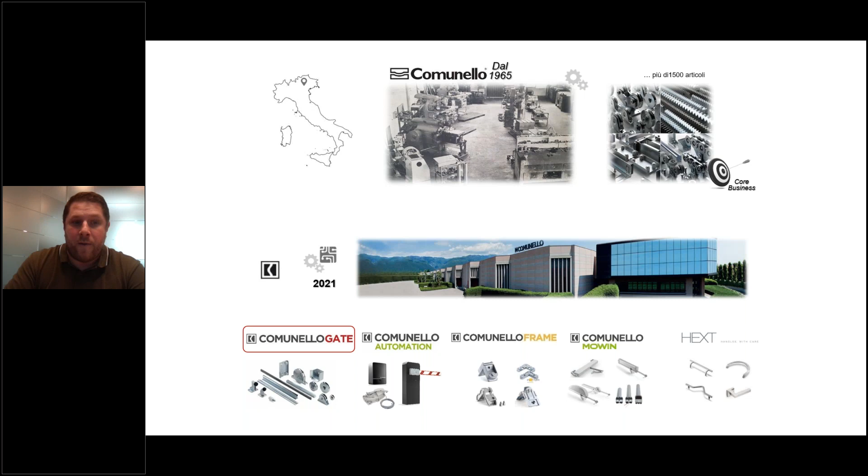It would be much easier maybe to produce something abroad sometimes, but we are very focused on quality. Quality is the most important part of our business and what we are going to provide. Quality for us is the most important subject with what we do. So also with the quality check and how we produce, we are very careful in how we do things and how we produce everything, and everything is checked one by one. Everything is checked.

So let's start with the gate division. We will see, let's say, just the surface of what we produce, so this will be a kind of general introduction to all our products. So for the gate division, we are producing all these accessories for many types of gates. Let's say for almost all types of gates we have something to offer.

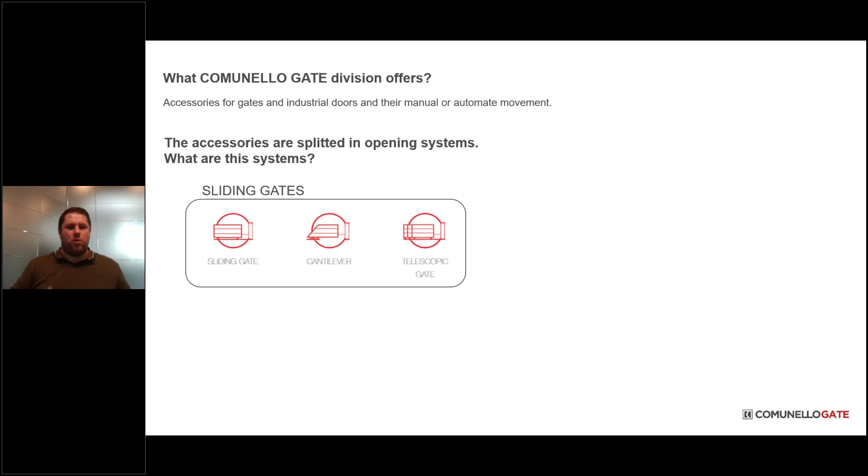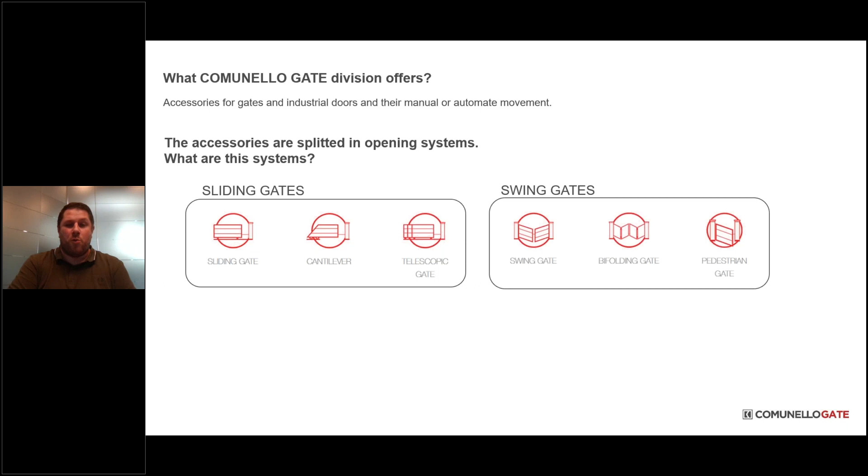So sliding gates, of course, which can be split into cantilever gates and telescopic gates, besides the traditional sliding gates with the rail. Then we also have accessories for swing gates, also bifolding gates and the small pedestrian ones. And then we also have a branch of the gate division, which is industrial doors, so suspended gates, folding doors and sliding doors that you can find in industries, for example. We also have some accessories for steel doors and windows.

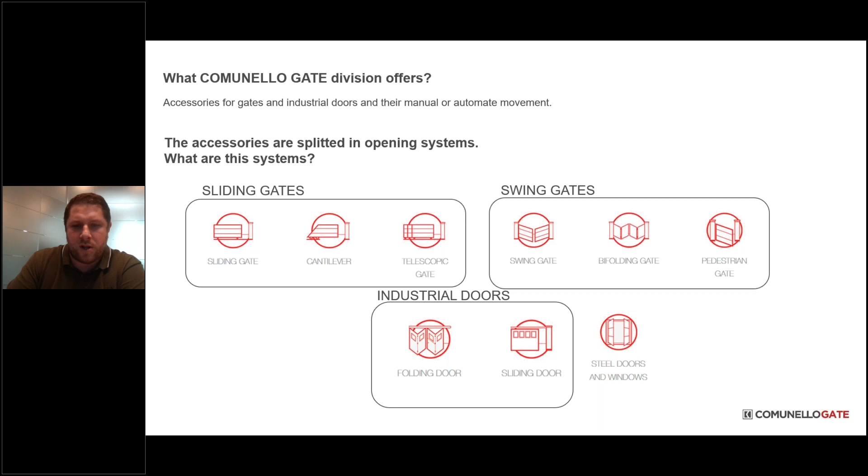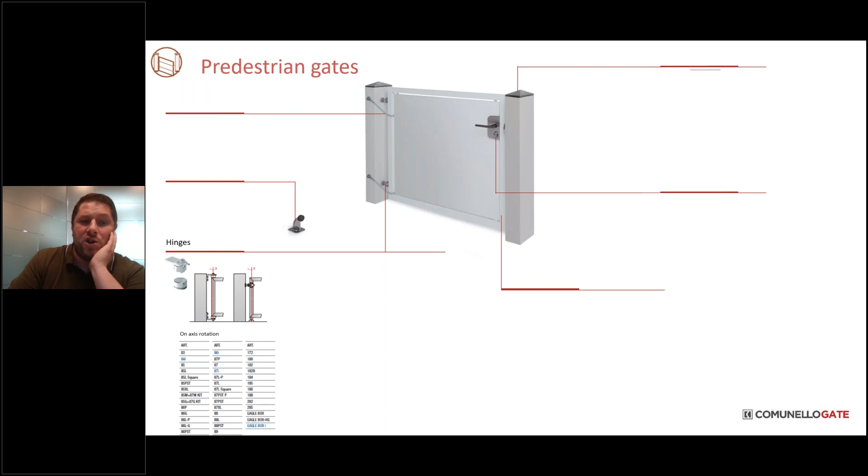So let's see first of all which are the components, the families, the categories of products that we can offer. We have hinges, first of all, for the swing gates. We have different kinds of hinges, on-axis and off-axis rotation ones, and also some hinges for 180 degree openings. We have all the smaller side accessories like gate stops, the anti-fall ropes as a protection. Then we have the pillar covers, which are really simple pieces actually. Locks and accessories, the latches.

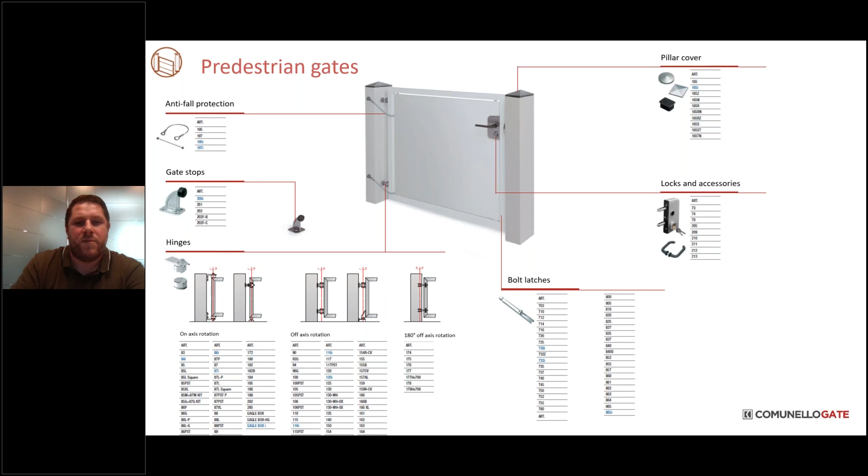For swing gates, the most important things are the hinges. So here we have a global view of the hinges that we have. Let's say that the hinges that we produce are a sum of all the needs that customers may have. There are also some geographical reasons why we are producing certain types of hinges, because of some needs that installers have around the world, around our markets. So you can find many different hinges that are for the same purpose actually.

So as you can see, our company is producing many different hinges, and the on-axis rotation ones are those for which the rotation is inside the profile of the gate. We can say that the most popular ones are the ones that you can see in the kit, so the 85 and the 87.

When you are going to choose one of the hinges, it's very important to determine the weight of the gate that we are going to create. We have to know its weight, because with the weight and the measures of the gate, we can suit the perfect hinge. It's important to be very careful with these parameters in order to create a perfect gate. The quality that we do is also thanks to the skills of our customers. So it's very important to choose the right product for the gate we are going to build.

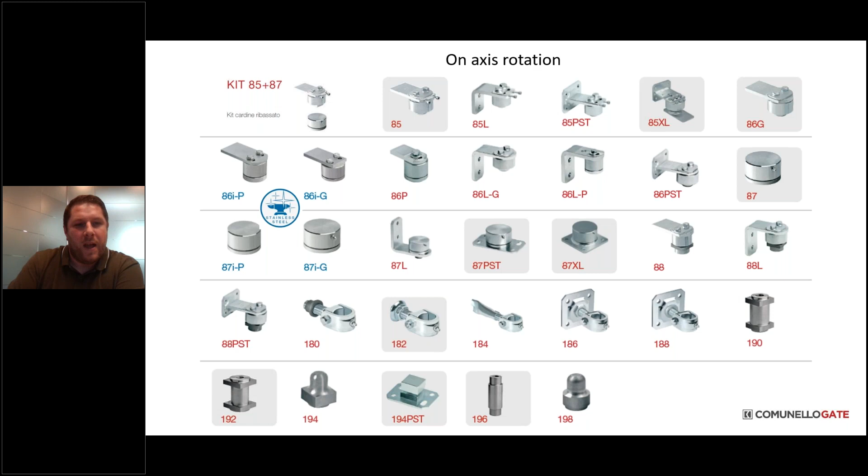As you can see, the on-axis ones can be of several types. The on-axis rotation, as I told you, the most popular ones are the ones on the left side of the page that you can see here. So the bearing hinges. With the bearing, we can grant a really big capacity. We also have some hinges that will have a capacity of 4,000 kilograms. So that means for heavy duty also.

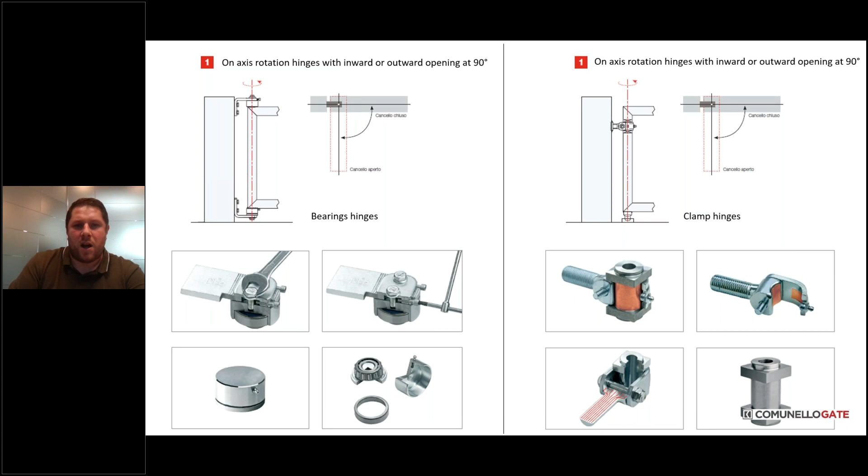Then we have the clamp hinges, which are also inside. With the clamp, we cut the profile and then we put inside a pin, let's say, which is clamped by the hinge. These are the typical off-axis rotation hinges, so hinges that are on the side of the profile. Generally, with this type of hinge, we cannot reach the same capacity as in the previous category, but they are very popular because they are really easy to install.

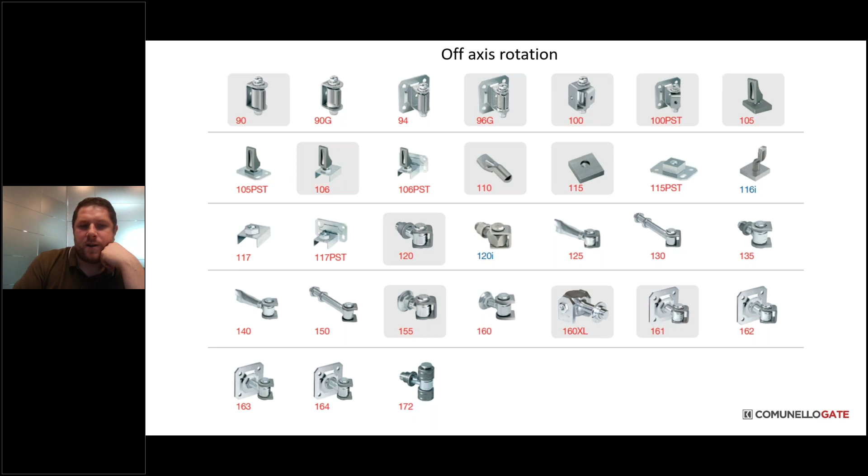You just have to place in the pillar a part of the hinge, and the other one is welded on the profile, so it is very easy to manage as a product. Then, as you can see, there are many different types of these hinges.

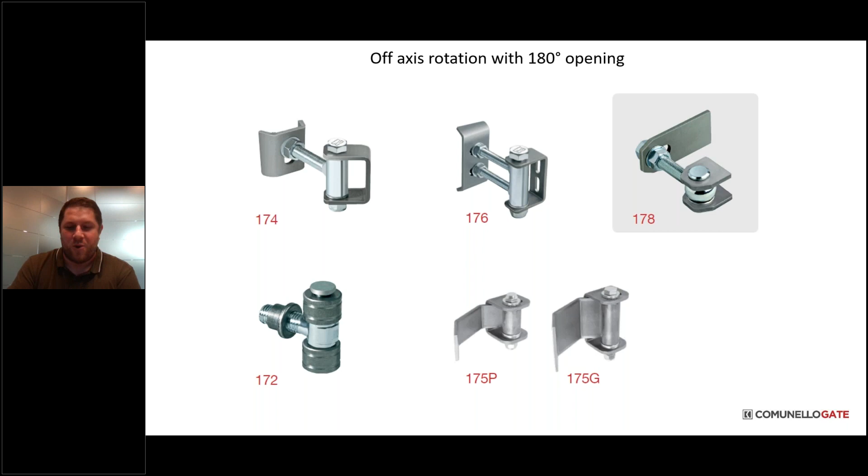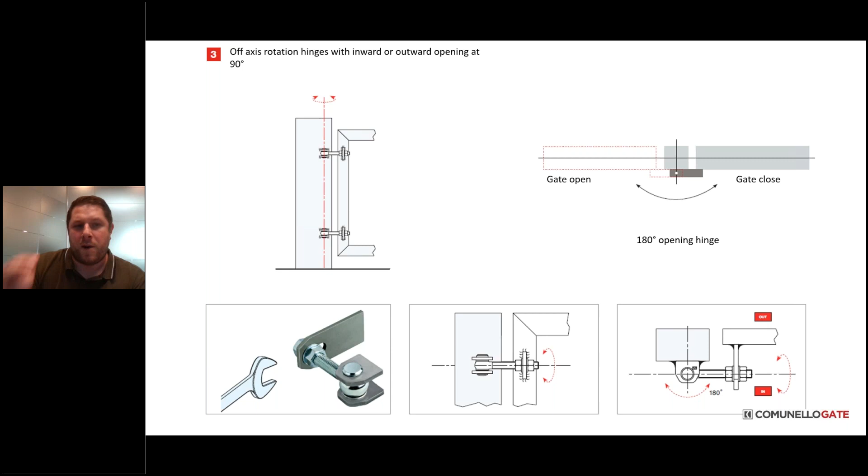For the 180 degrees opening, this is a special kind of hinge which is necessary, for example, when it's not enough just to open a gate, but you need also a free pass maybe for a car or for the machine or for trucks, just to be able to reach the maximum opening of the gate. So this kind of hinge, of course, is much more complicated and the capacity will be much lower, but we have also this option available.

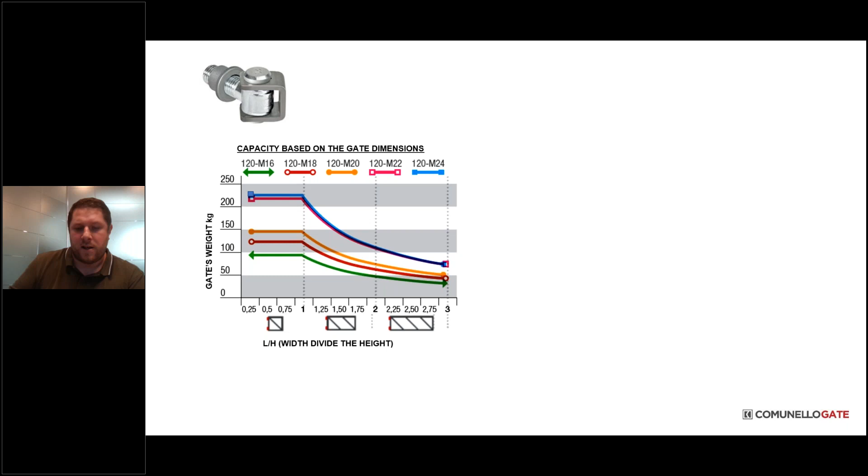The most important thing, as I told you, when you are going to decide which kind of product to choose when you are going to build the gate is to read the technical sheets that we have in our website. So you can find all this information in our website, or they can be provided by our agents, by EPCOM. You have to determine, first of all, which is the ratio between the length of the gate and the height of the gate.

So when you are able to determine this ratio with the dimension, we can determine the actual capacity for the weight of our hinges. It means that in the catalogs, for example, you will read a number, which is the capacity in kilograms, but it is just the capacity that we can grant you if the ratio between length and height of the gate is 1. It means length and height are the same. If the height is more than the length, no problem. We can grant you the maximum capacity.

If then, as it is more usual, at least in Europe, the length is more than the height, then we have to be careful on this graphic that you can see and determine in this way which is the actual capacity of each hinge. This is something very important.

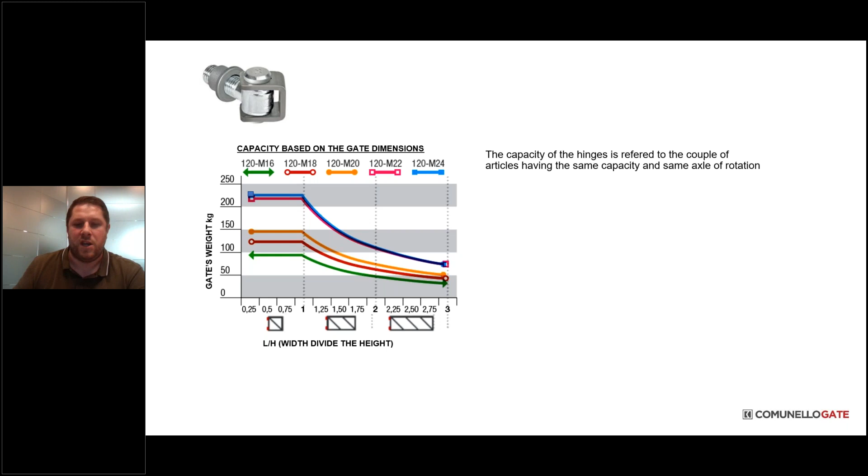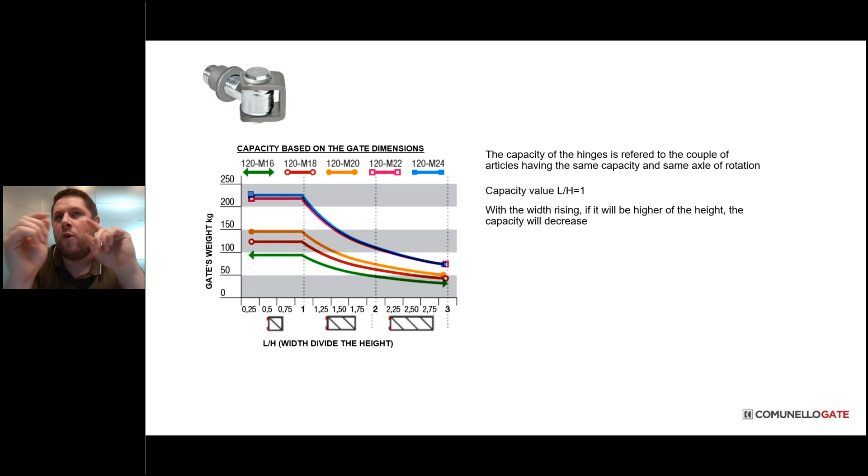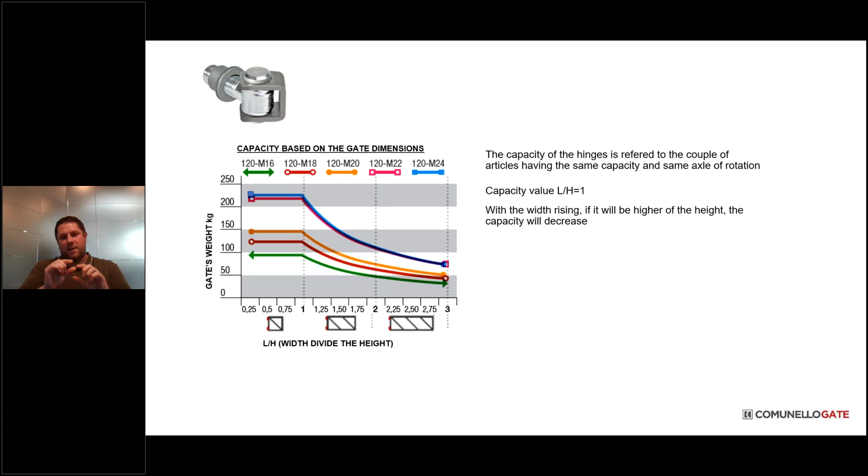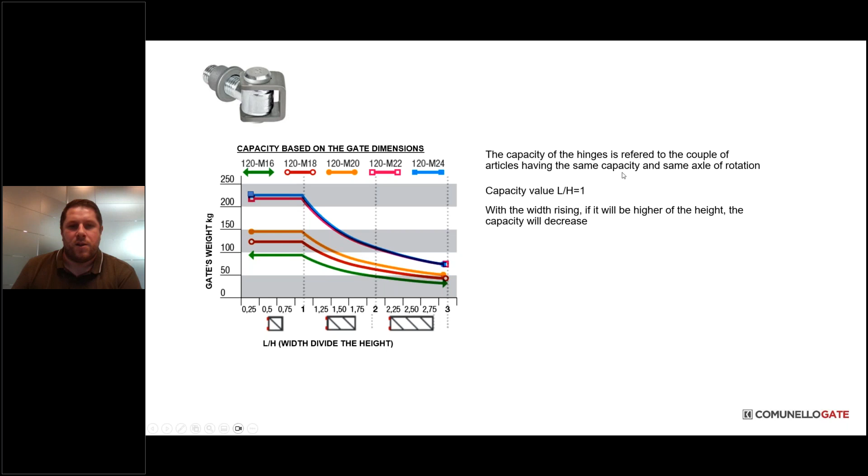So one more thing, it is just a recommendation. If we have two hinges with different capacities, the total capacity that we can grant is the minimum capacity value, which is the real capacity of the gate that we have. For example, if we have 200 and 150, the total capacity we can declare for the combination of the two hinges will be 150. So the minimum one, the smaller one. Okay.

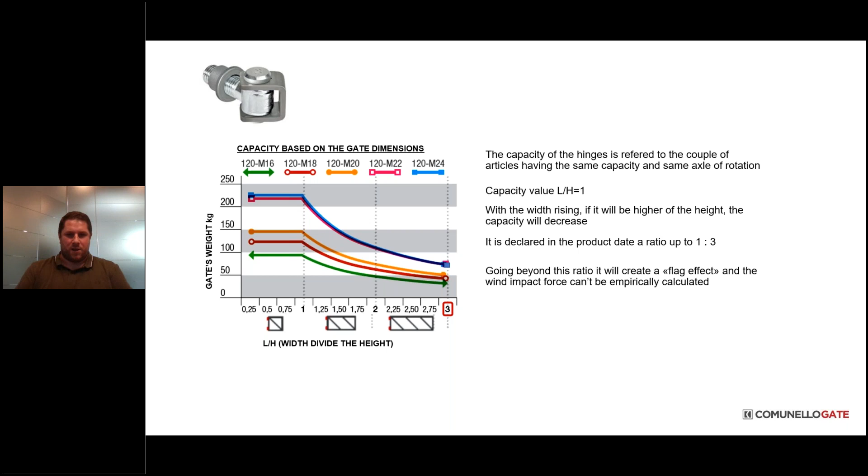As I told you, we declare up to 3. The ratio cannot be over 3. Over 3, we are not able to grant you anything. So there is no test made, and it means that maybe something in the dimension of the gate must be changed. Okay, so we can proceed.

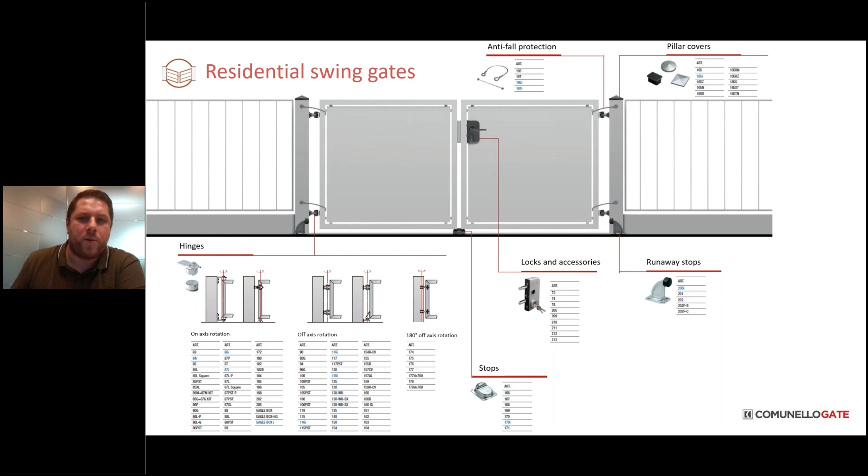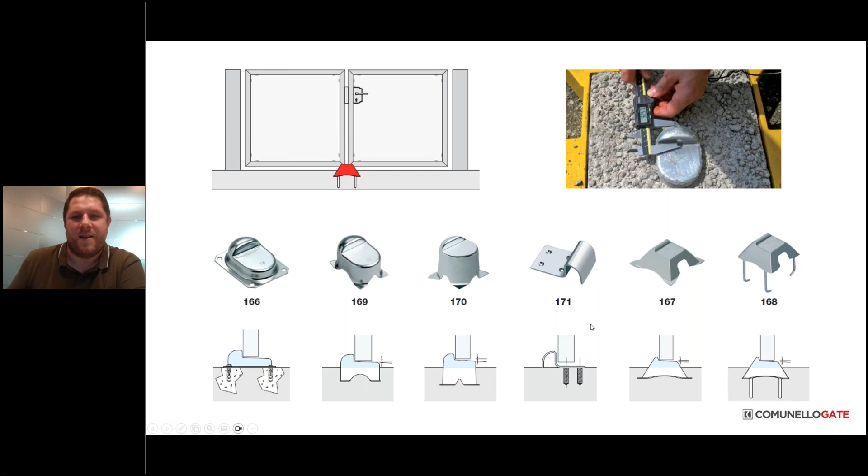For swing gates, as I told you, it depends on how big the gate is that we have to create. As you can see, we have also possibilities of providing locks and accessories of all kinds, the runaway stops, for example, which are very important, and the stops to stop the two leaves of the gate in the middle part. Otherwise, it will be maybe on the street, and it's not what we want to create with our products. So we have also all these safety devices that are useful to create the perfect gate.

Let's go now to the sliding gates, which are maybe the main products that we are going to see today, because this is kind of the core business, I think, for the American markets. For sliding gates, of course, the choice of the wheels is the most important part of a project. So we can see here now the typical sliding gate with a wheel on the ground with a rail.

The wheels, as I told you, we will see then in detail. It is the most important component of our gate that we have to choose. Then we have the tracks, the guide plates, which are very important for the stability of the gate and to keep it in a horizontal position with a perfect sliding during the whole time.

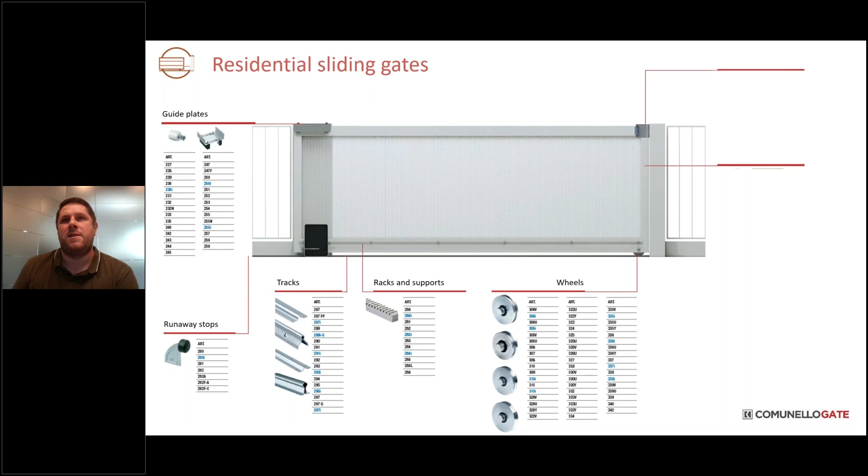The runaway stops, of course, to stop the sliding. Rack and support, which are necessary if we are going to make it automatic. The upper end and the locks accessories, of course, and other devices and safety.

Then we can see here, this is something important, as I told you. We can see here the choice of the wheel. This is very crucial, very important, because this is the most important part that we have to choose. And we have several diameters, of course, of wheels.

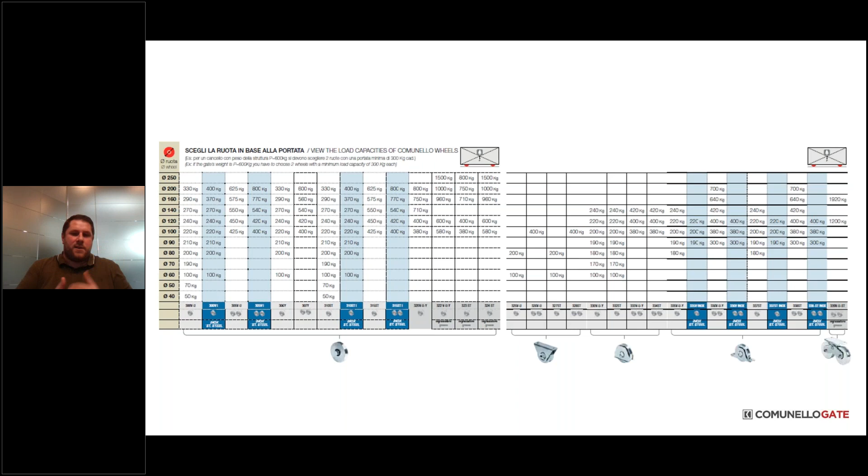One thing I didn't tell before, I know it is very important for you: all the accessories are with the metric system. So I'm speaking today with kilograms and millimeters. So I apologize for this. I'm not very used to the

imperial measures, but as you can see, there are several diameters of wheels, and we have also different supports. So different types of how the wheel is equipped, just to fit perfectly in the profile that we are going to use.

An important rule to determine which is the right wheel to choose is to see the capacity, as we did before. But this time with the wheels, the total capacity is given by the sum of the wheels. So if we are going to choose, for example, this wheel, let's say the 300V, with a diameter of 120, it has a capacity of 240 kilograms. Two of these wheels will have a total capacity for the gate of 480 kilograms.

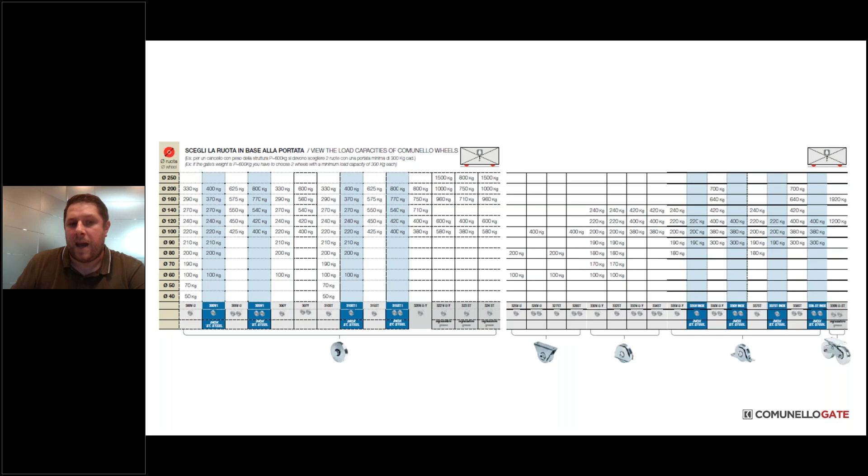If we are going to choose 3 wheels, we will never be sure that the 3 wheels are working at the same time, and it means that always the real capacity of the gate will be made by 2 of them, not 3. So this is the reason why we cannot cheat too much with the numbers, with capacities.

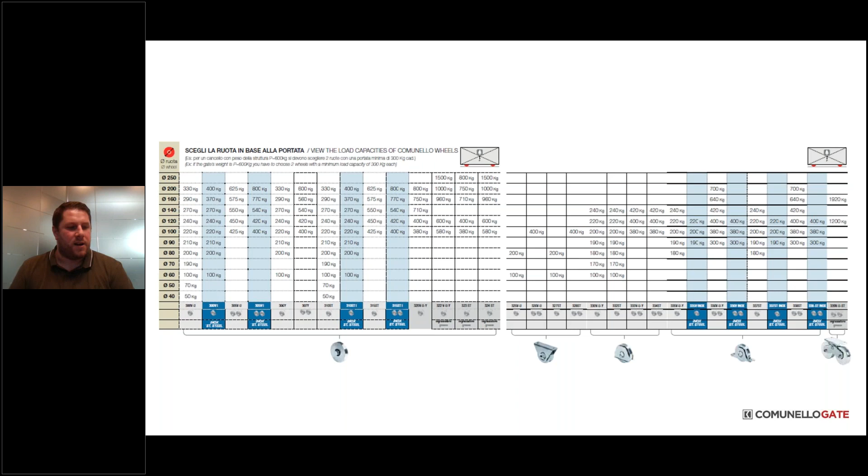As you can see, there are also the other supports for the wheels. These are given just for some specific needs of the installer, because sometimes it is much easier for them to place them right under the profile or inside the profile. So we have these different types of support just to complete the offer and give the customer everything for their needs.

For all these products, of course, quality is very important. All the wheels that you see are produced here, and all the production is made with the lathe machines that we have here in our company, and the quality of our wheels is very well recognized in the market. The quality of our products is very high, and that is easily recognizable from the wheels also. Many of our customers call our wheels the Ferrari of gate accessories, especially for the quality, which is very high.

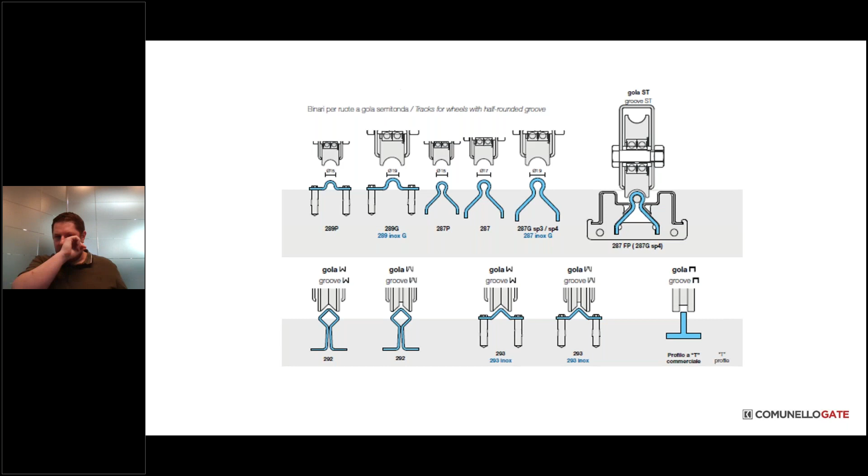The rails don't really have a capacity declared, they don't have any kind of capacity declared, actually. The capacity is just given by the wheel. So this is very, very important.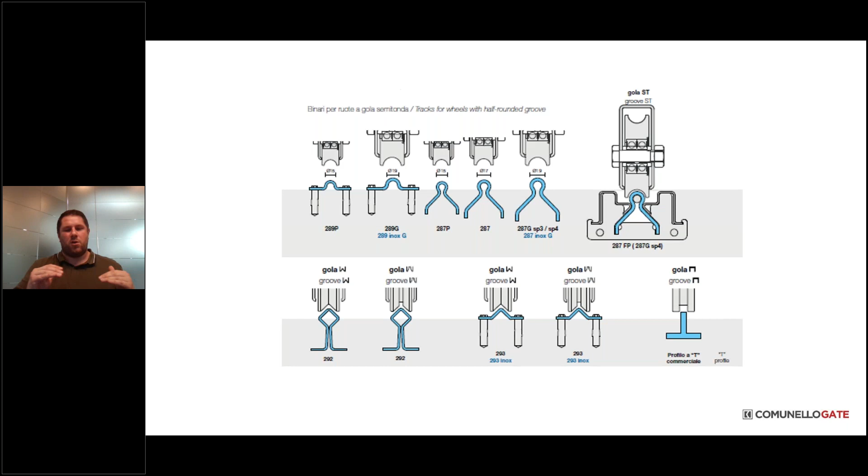As you can see, we also have some solutions for invisible racks, invisible wheels and rails with 287 FP. It means that it is completely covered inside the soil, so it is almost invisible, almost invisible.

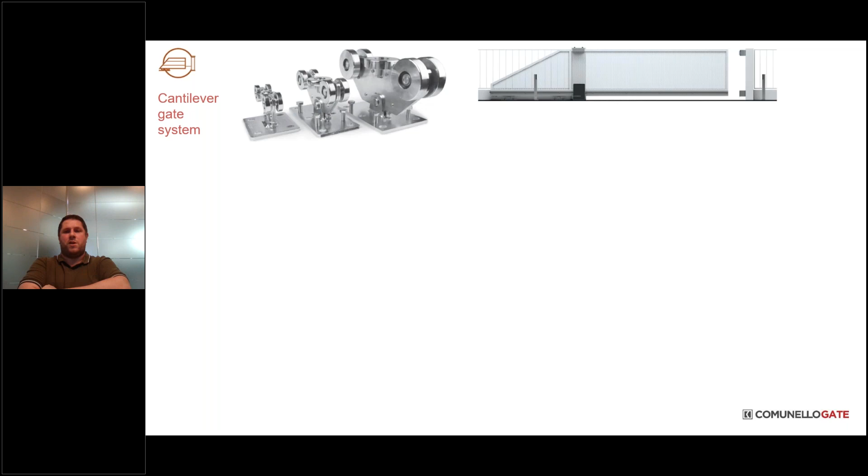Then we can switch, we can go further with the cantilever gate systems. We have many different solutions. This is something very important for us, and for this type of products, it is very, very important the accuracy. We must be very accurate in the choice of the accessories, and also in the dimensions, in the measures that we are going to have to build this type of gates.

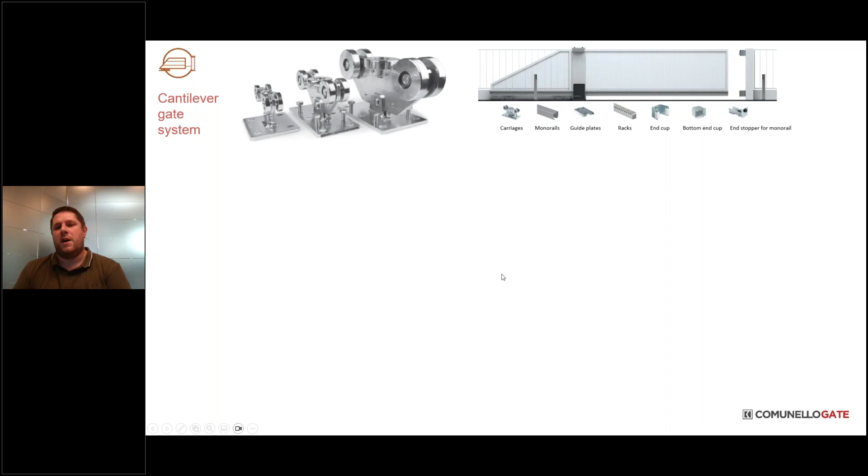So for the cantilever gate system that we offer, we can offer a complete range of products to build the entire gate. So we have the carriages, monorail, all the guiding plates, racks for the automation if necessary, end caps, bottom end caps and stoppers. But the most important part is to determine which is the carriage, and so also the monorail to use. We have, as you can see, many models of carriages with many sizes, and also different materials if necessary.

Let's start with the smaller one, which is the CGS 150. It can be M or P. For the other families of products, for the other categories, we have also the G, and I'll explain you what they mean, what these three letters mean. M stands for mini, the Italian word mini, which means very small. P stands for piccolo, which is small, while G stands for grande, which means big. So these three different sizes will also determine which is the right one to be placed, considering the weight and the measure of the gate that we have to move.

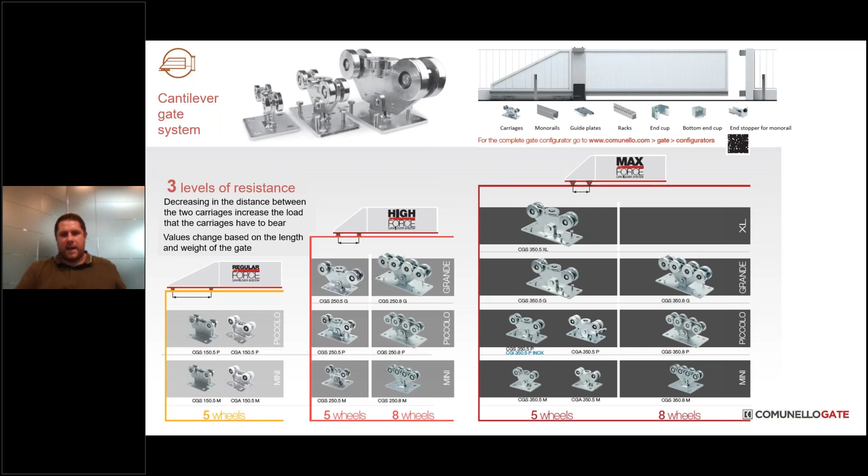Then you can see how it works, for example in the choice of gates. We also have the XL carriage, as you could see before, on top of the 350. This XL is used for very heavy gates - we can reach up to 20 meters long and 3,000 kilograms.

As I told you, the configurator will give you the I, the inter-axis between the two carriages, and the FA, which is the dimension, the length of the foundation that we have to create with fresh concrete, just to fit exactly with the dimensions given by the configurator.

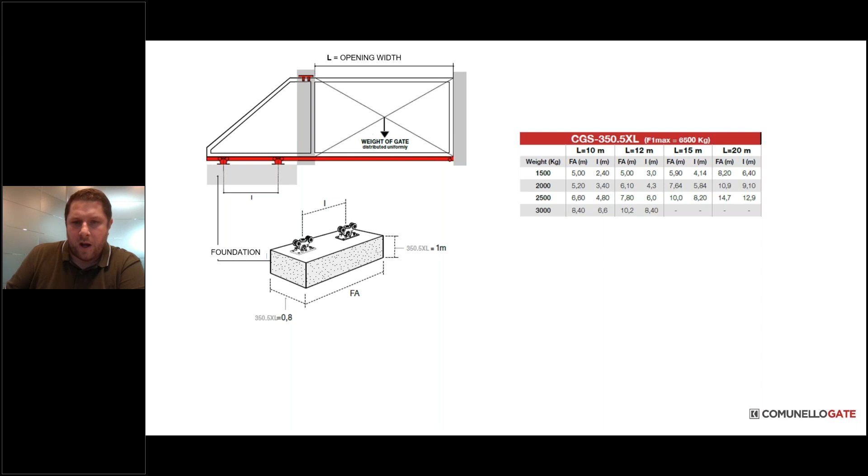As I told you before, we have an online configurator. You just need to go to the login page, on the top right corner of our website. When you log in, there is a silhouette of a person, then there is the user area, where you can have configuration for cantilever gates, but also for other typologies of gates. I encourage you to register for this service that we can offer you, so you are independent in choosing products for your customers' needs.

For example, we can see here in the table a combination between 12 meters and 1500 kilograms. You can see the dimensions given by the table, which determine how large the distance between the two carriages will be, and also the dimension of the concrete foundation.

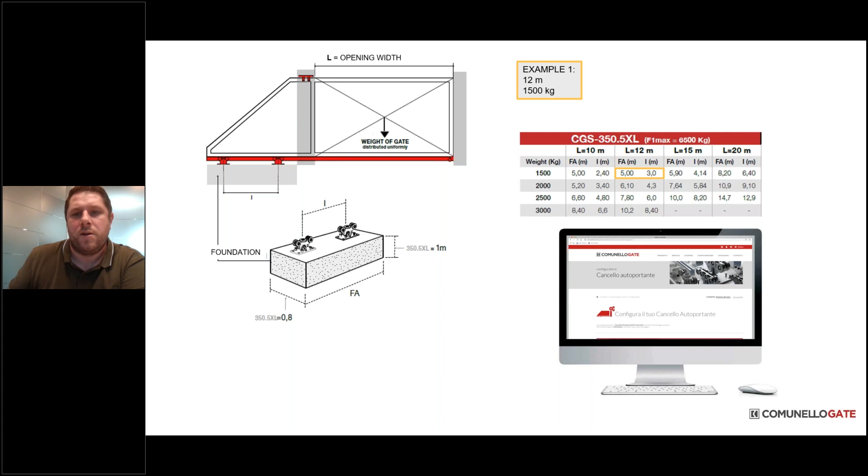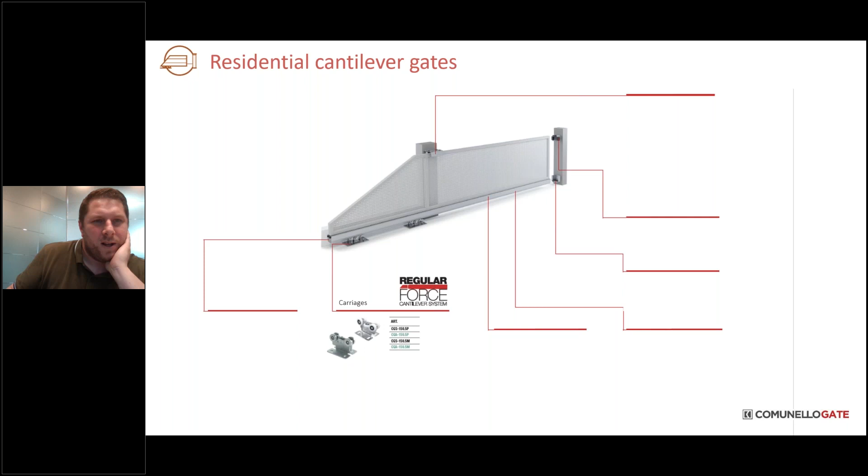Then, for different types of gates, you have different sizes. There isn't really a standard one. This is for the smaller cantilever gates.

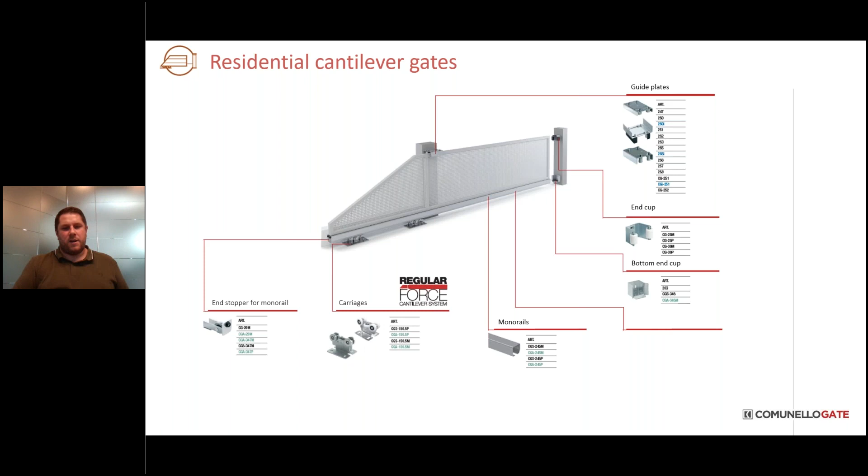We also have a kit made of two small components, just for small duty cantilever gates. We can choose between this kit, which you can see in the bottom part of the slide. In the kit you will find the guide and the plate - the two carriages - for gates up to 3 meters and 300 kilograms, and another kit for gates up to 6 meters and 600 kilograms. In this kit you will find the two carriages, the guide, the monorail, and the end stops - the essential parts to make a cantilever gate system.

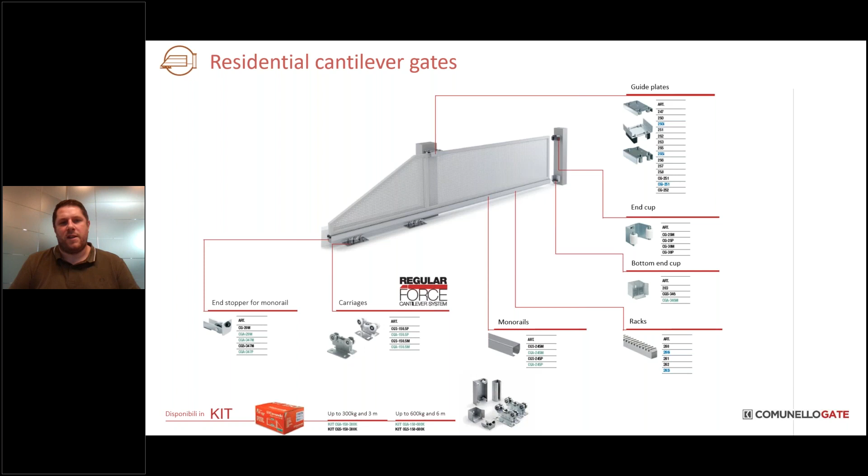As you can see here in detail, these are the components which create a cantilever gate system kit.

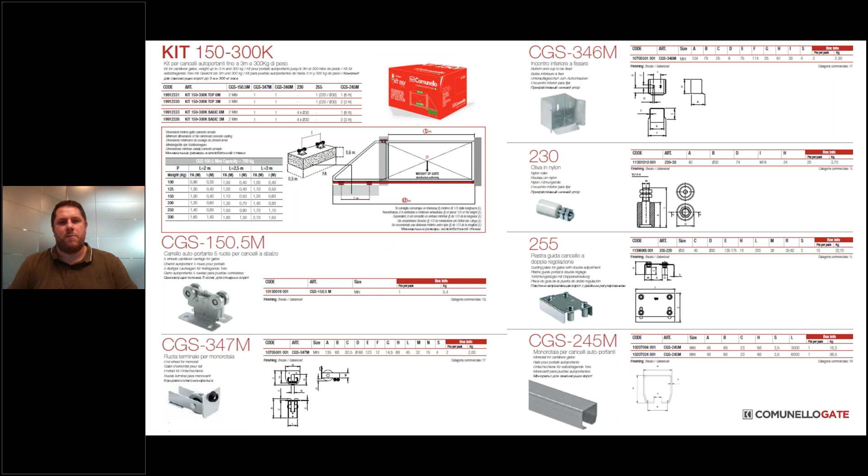For bigger gates, we have the 250 family, as I told you before. They can be either in 8 or 5 wheel versions, in mini, small, or big - so the very small, the medium one, and the bigger version.

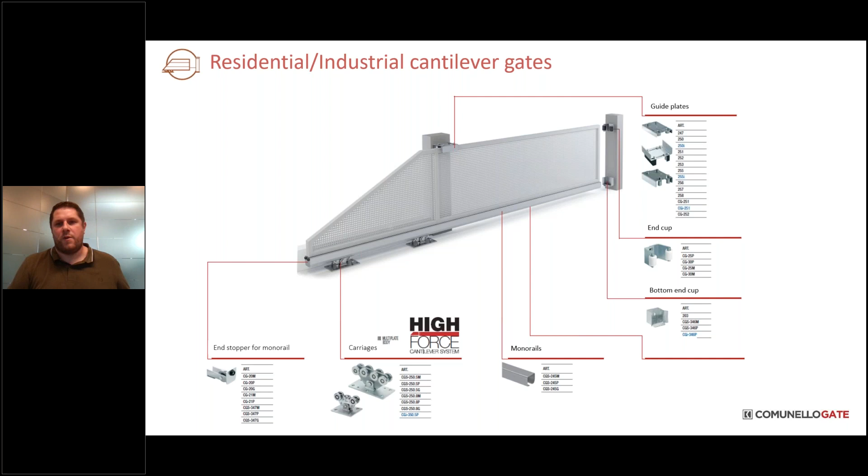All these parts, as you can see, also the monorails, if you are going to choose for example the 250.8 M, we will have to choose the corresponding monorail, so it will be the 245 M. All the other accessories will be tailored, made on the same shape, same dimension. So if you're going to choose M, all the accessories will be with the M, just to fit perfectly on the choice of the carriage. All the accessories will go with the same category. So we have here the entire type of accessories that we have to install for these gates.

And also this is for the maximum force for the bigger versions of products for industrial gates. As I told you, with this one we can reach with the 350 G, with the 350.8 G, we can reach up to more or less 2,000 kilograms. Then we also have some special carriages which can lead us to very heavy duties, like also to 6 tons. So for very big gates, big beasts.

Okay, we have here the same type of products with the same dimensions. They always have to fit, and they are determined by the choice of the material, by the carriage that we are going to choose when we are making the configuration of these gates. This is very important, this is crucial, because the choice of these carriages will determine the real weight that the system can carry.

One recommendation when you are going to make the configuration, as we always use here, the interaxis between the two carriages should be always between 1/4 and 1/3 of the length of the light, let's say the distance between the two pillars. This is a kind of parameter to determine which is the right carriage to choose for each cantilever gate system.

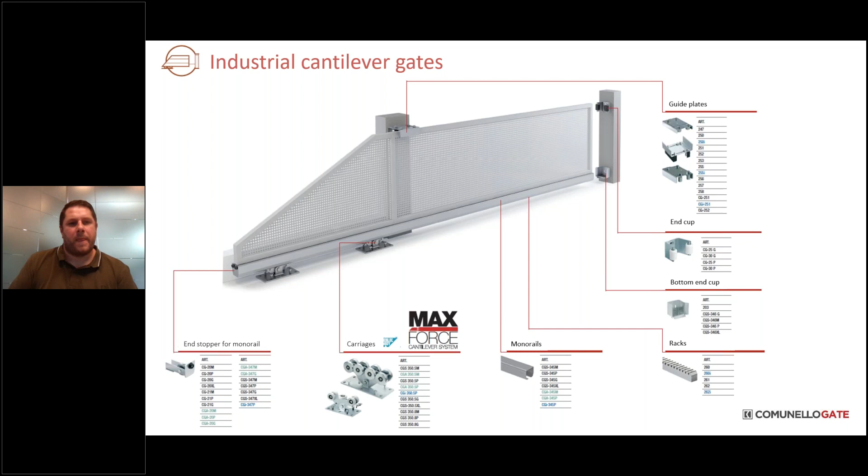Let's see quickly, also we have accessories for industrial folding gates, industrial doors. Generally these are made... these are the gates that are used here. I don't know if in the American markets they are pretty popular for the gates of the industries, so where trucks enter, for example, in the company. So we have a big range of products and accessories necessary to create this kind of gates.

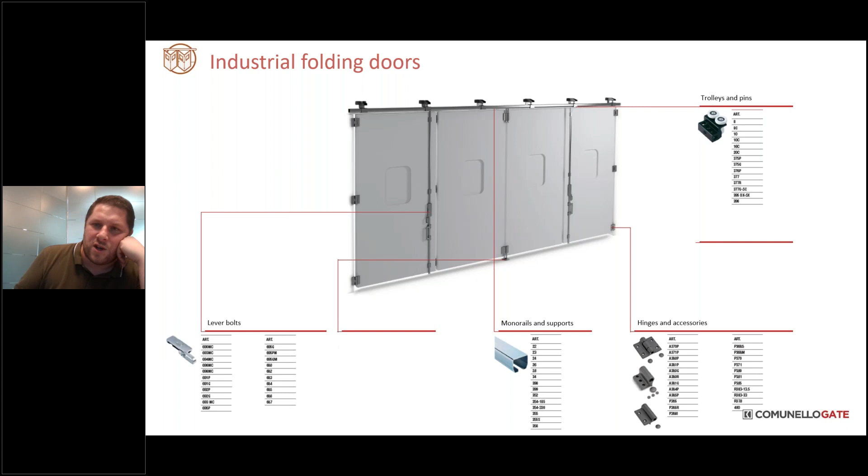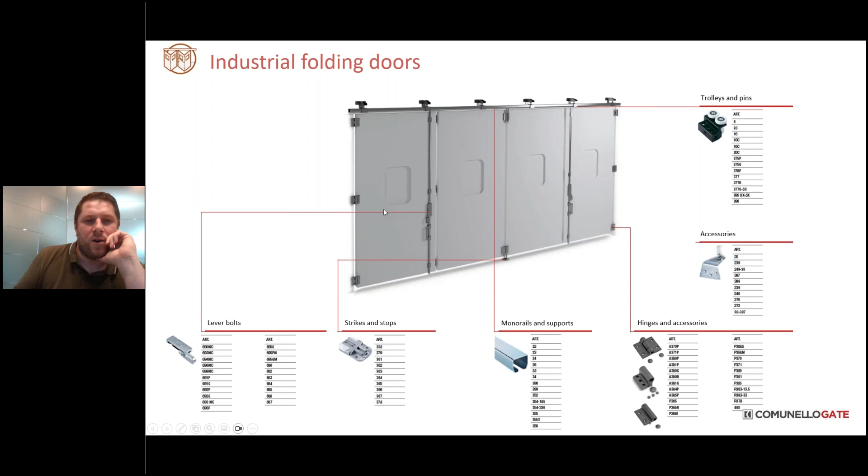We have the monorails, the hinges, the trolleys that are sliding on the top of the gate, lever bolts for their openings with all the strikes and stops. This is a kind of typical configuration of a bifolding gate. It's bifolding, so it's opening on the sides, two on one side and two on the other side.

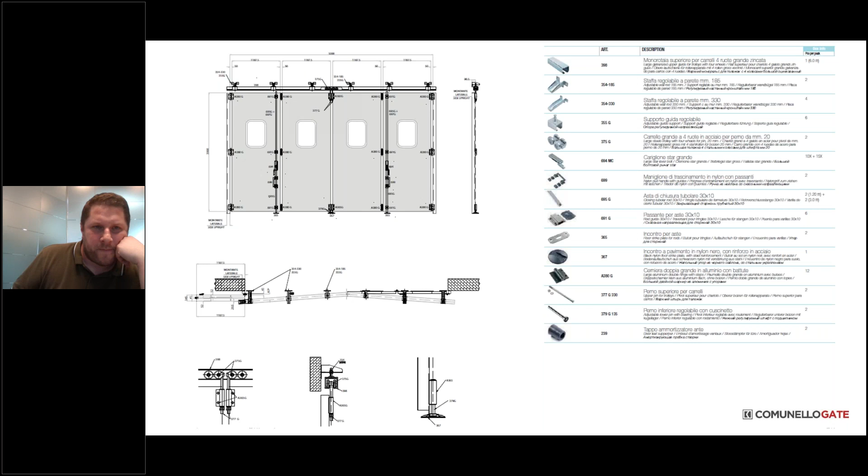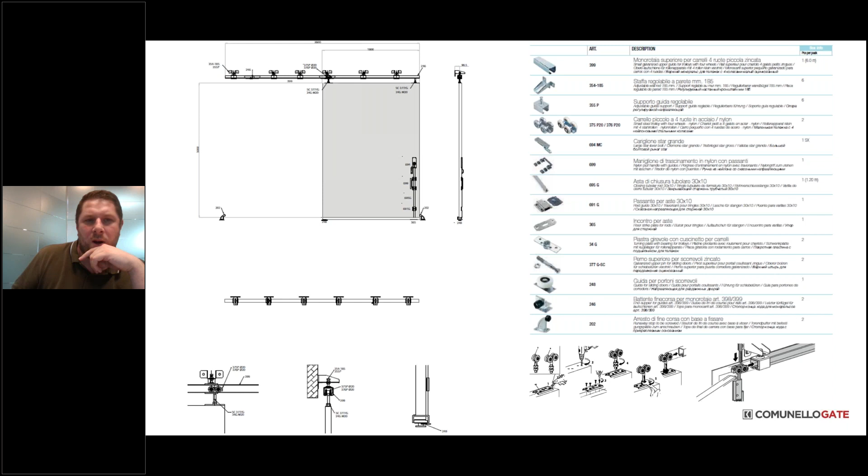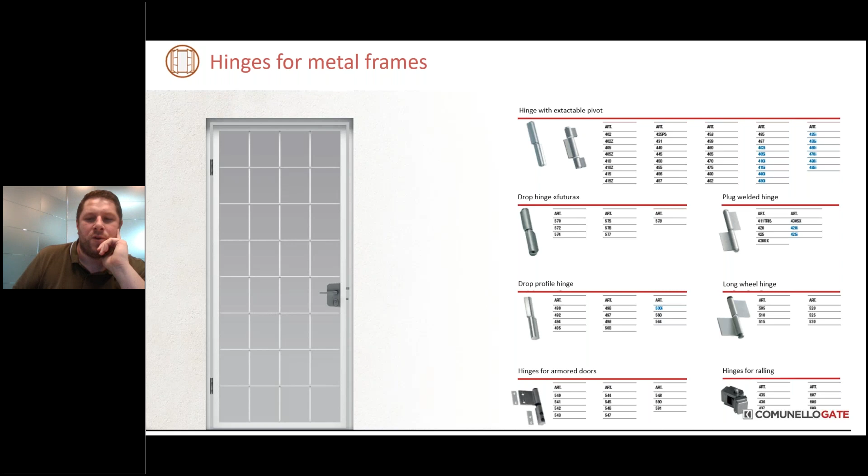This is a sliding door gate, so this is just sliding from side to side. We have also hinges for metal frames for doors and windows. We have a big choice of this kind of products to open for smaller duties, but they are very popular because they are compact and you can install them. These are always to be welded on the doors and windows.

I didn't tell you, it is not in this sliding... we have also the possibility for sliding gates, we have also the telescopic gate. So we have the possibility to create a telescopic gate, meaning with 2 or 3 leaves. So we can have a sliding gate where, if we have for example a very small space in the rear part of the sliding gate, we can make these telescopic gates with 2 or 3 leaves.

This is a kind of new product, new system that we have. It's a few years that we are offering this solution. This is very important for all the customers. If you have some special needs because of the space, you know that we have these telescopic gate solutions. You can find a lot of information on our website about these products.

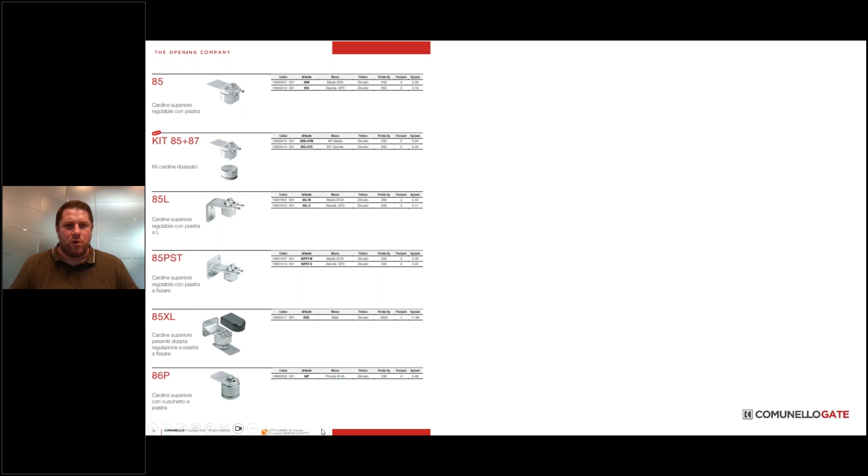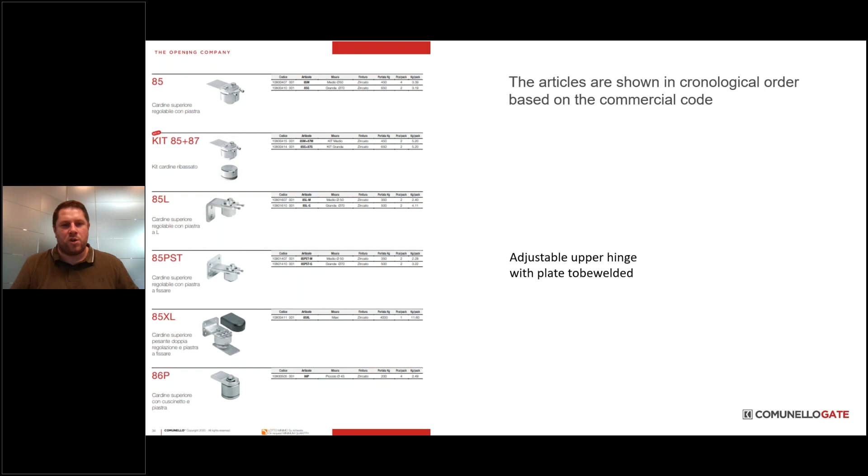As you can see here, there is really a quick guide on how to read our catalogs, and also our website. In the catalogs, as I told you, all the articles are shown in chronological order, so they are in the order of the number of the articles, generally all in the same category, so the numbers go chronologically. With the catalogs, you can have all the information about, for example, the capacity of each product and how many pieces you can find in a pack.

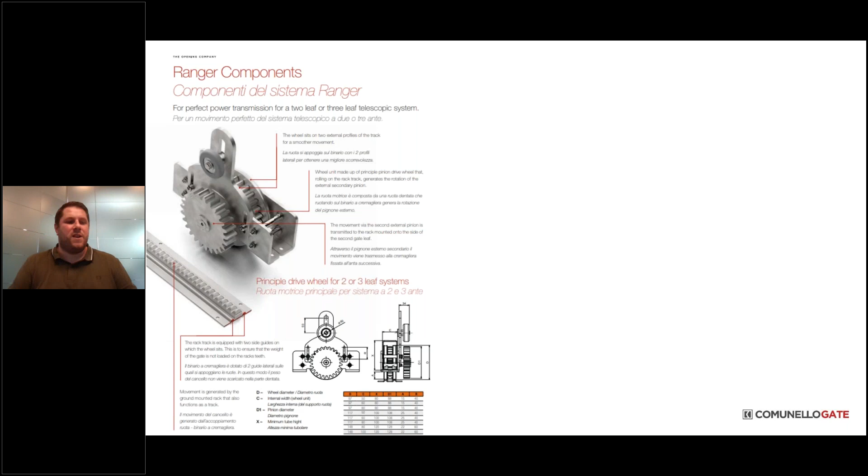Then there are some systems catalogs. This is the Ranger that I told you about. Ranger is the telescopic gate system that I was briefly telling you about a few minutes ago. This is a system made with a rack rail. These rack wheels allow a really smooth movement, they move very silently, and this is a really nice system for telescopic sliding gates. This is a solution that can be very useful and very helpful for some projects.

This is a catalog dedicated to these new systems: Albatros, Bullet, Integrator, and Ranger. Briefly, Albatros is the bifolding swing gates. So if we have big swing gates which cannot close on the two sides, the typical swing gates, one leaf on the left and one on the right, you can close both leaves on just one side. Bullet, instead, is a system made by just one carriage for cantilever gates.

It is just one single carriage, which is actually very big. You can choose the position from the inner one to the outer one. In this way, you are able to dimension it depending on the weight and the length of the gate. More information about the Bullet is on the website, and also for the Integrator.

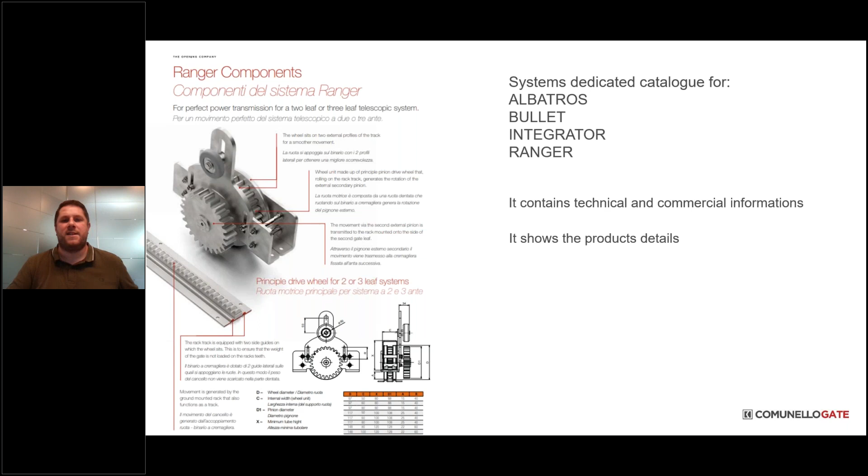This is a system made to make the automation of the entire cantilever gate system almost invisible. So the automation is inside the cantilever gate system. It means that the rack of the motor is welded inside the monorail. With this system, the motor is placed on one side of the gate, and the pinion will transmit the motion inside. So it is absolutely invisible. You just see the cantilever gate and the motor, but you cannot see any kind of rack outside. So everything is much cleaner, let's say. So this is something important.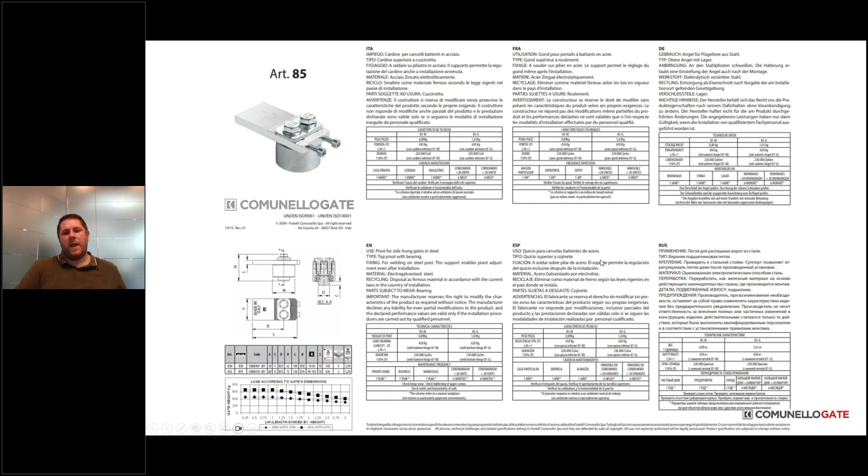As you can see here, this is what will appear on the page. And you can download the technical schedule, which will look like this, with multilingual information and data, and also the graph, which, as I told you, is very important to determine the capacity of each article. And also some instructions on how to mount them.

We also have a YouTube channel for more details, also for the new systems that I told you about, Integrator, Bullet, Ranger, and Albatros, which are the new innovative systems that we developed in recent years. This is, as I told you, important for you to have a complete vision of what Comunello is producing.